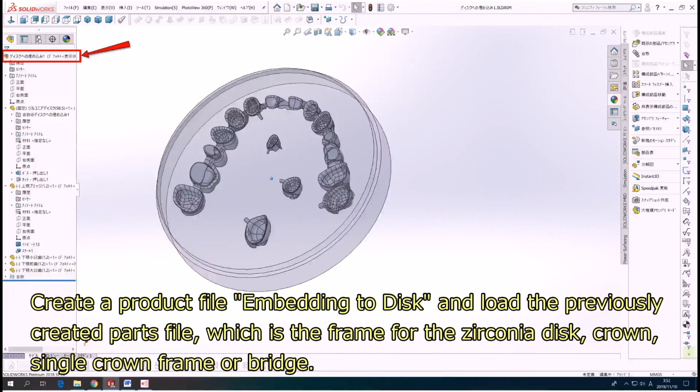2. Create a Zirconia disk, 98.5 mm. Create a product file, embedding to disk, and load the previously created parts file, which is the frame for the Zirconia disk, crown, single crown frame or bridge.

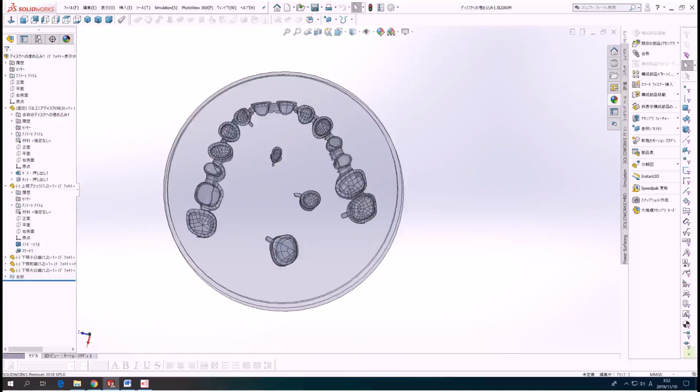Make the Zirconia disk semi-transparent. Place the created pattern in the appropriate position. Activate the Zirconia disk. Make a sketch on the surface of the disk. The spline command is used to create a line to hollow out around the bridge or single crown. The extrude cut command was then executed.

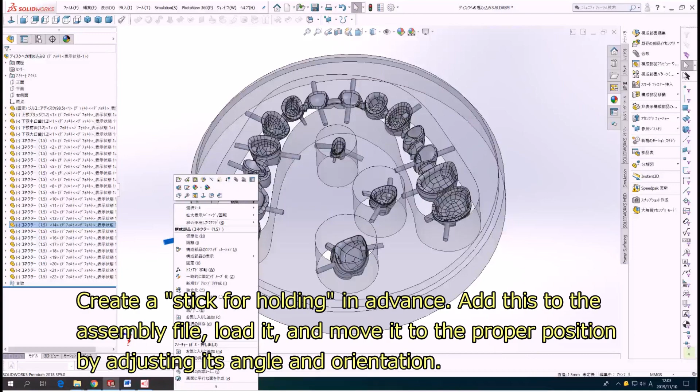Create a stick for holding in advance. Add this to the assembly file, load it, and move it to the proper position by adjusting its angle and orientation. If the frame is thin, for example, the stick will poke through to the inner surface. This is not a problem, as we will remove that portion later.

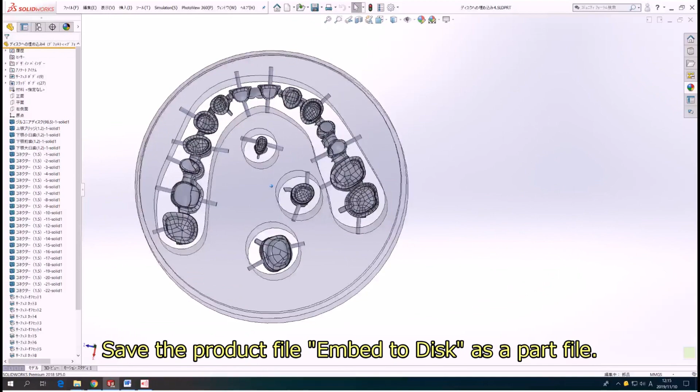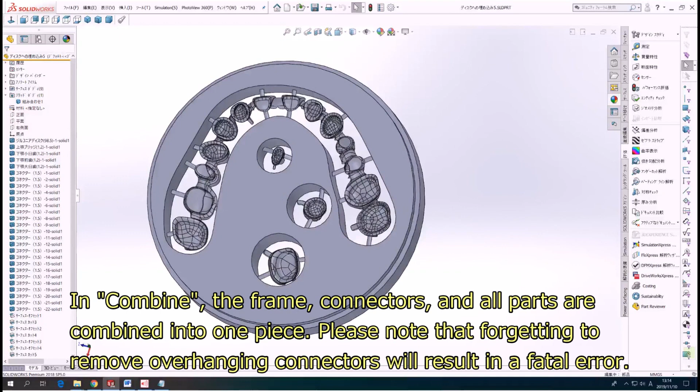Save the product file, embed to disk, as a part file. The parts file in the assembly file is now the feature in the parts file. Cut the inner overhang with cut with surface. In combine, the frame, connectors, and all parts are combined into one piece. Please note that forgetting to remove overhanging connectors will result in a fatal error.

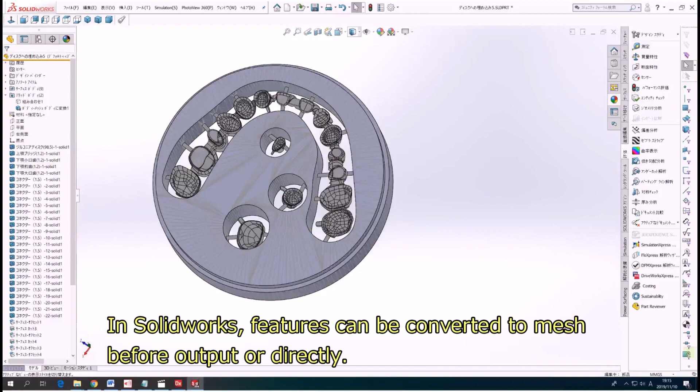Convert the file to an STL file for use in CAM software. In Solidworks, features can be converted to mesh before output or directly. There is also an item called Define Maximum Element Size. The mesh of the disk itself is large, but can be made finer by setting this item.

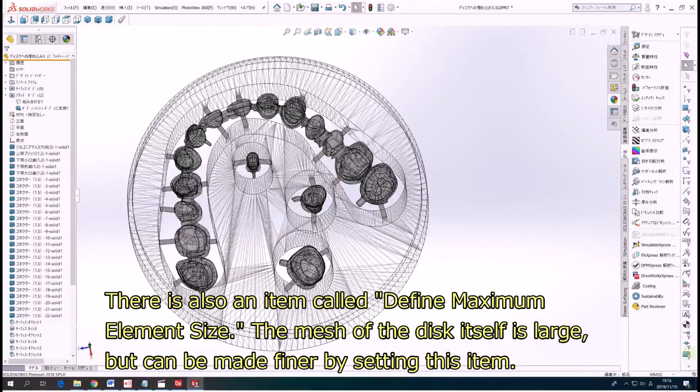I loaded the STL file from Solidworks into another software program, Geomagic Design X64. It was displayed without any errors.